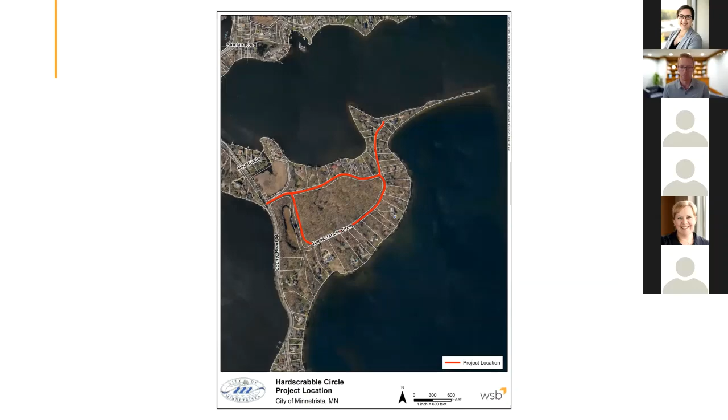So let's get into the project. We have 3 slides here with project location maps, as we are a little bit geographically dispersed with the project this year, coming up in 2021. The first area presented is Hardscrabble Circle and Hardscrabble Road, the neighborhood just east of County Road 44. That's one project area. Just south of there, still off of County Road 44, is Loring Drive, and further south is Stonebridge Road.

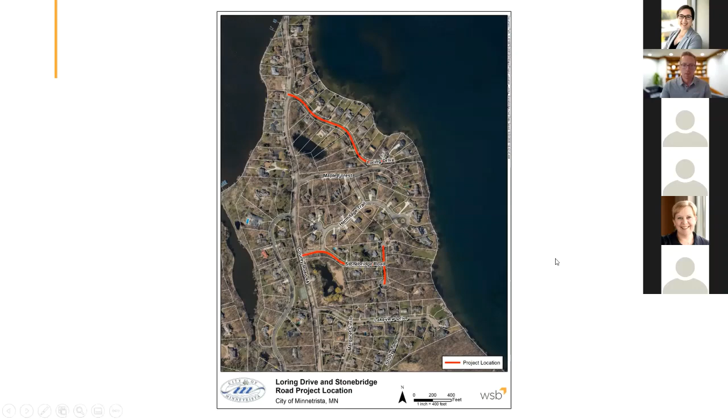Then we jump over and go north from here to a different part of town. Another street included in the 2021 project is Minneapolis Avenue, which is just west of County Road 19.

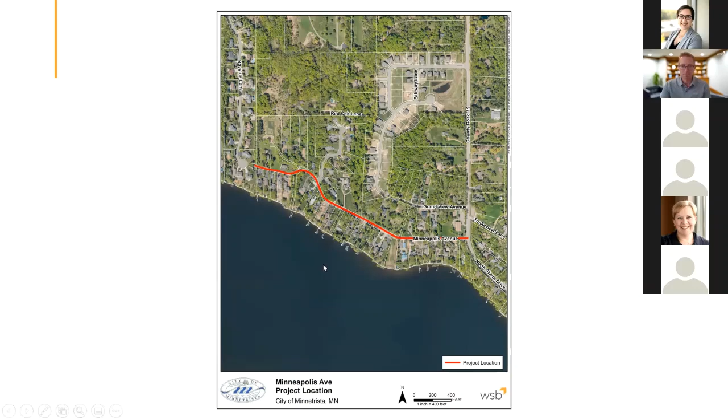So how did this project get started? Why is the city working to improve roads? The main driving factor is the capital improvement plan, and the direction city staff and city council want to move the city forward in order to improve it. This would mean improving the street and street conditions throughout the community to provide a safe, convenient, and cost-effective way for residents to get around town.

Prior to even determining what streets are included in a project, we look at the city as a whole and address all of the bituminous, or asphalt, streets. We look at their condition and score them based on a pavement condition index, which addresses a number of factors about the road and gives it a score. We look at that score and determine whether these roads need maintenance procedures, or whether they actually need to be reconstructed or included in an improvement project.

The other thing we do when putting a project together is look at what's underneath the roadway—does the city have water main, sanitary sewer, and storm sewer facilities, and what's the condition of those facilities? We'd like to disturb residents as little as possible, so when we're improving the pavement and streets in a neighborhood, we want to address any public utilities that have issues or need improvements, so we don't have to come back years later and affect residents again. So we also assess what the utilities look like in these neighborhoods.

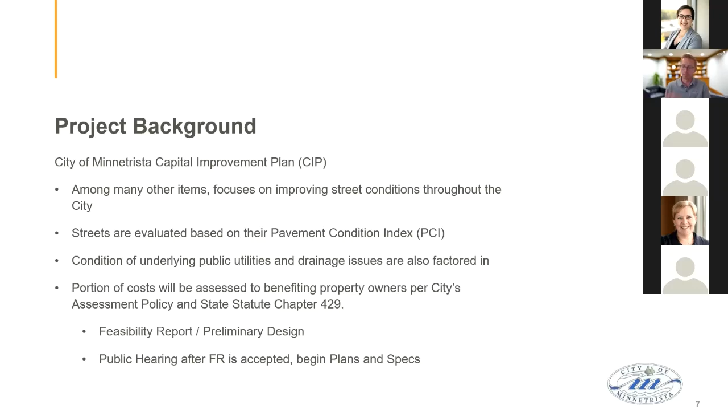After the feasibility report is accepted by the city council, there is a public hearing that orders the project. You as residents will be invited to that public hearing as well. If the council chooses, they would then authorize the preparation of plans and specifications for the project, and we'd really get into the design and creating the bid package to provide to a contractor. So that's the long-winded project background.

Let's talk about your specific streets. Let me minimize my video here so I can see. So as we look at the existing conditions, you folks are driving these roads day in and day out, and you know that the bituminous—another word for asphalt—material is starting to fail, or has been failing.

There is cracking in the form of alligator cracks, where it kind of looks like an alligator's back—it's really all falling apart. There's also transverse cracking, where there are large cracks across the roadway. Altogether, the pavement structure for all of the streets proposed in this project is structurally deficient, and it does need to be removed in order to be improved.

There's no maintenance work that can really provide a long-lasting solution. Public Works staff over the years has done a great job of patching these streets as best as they can, but that only works to a certain extent, and it can become expensive and costly, so that also gets factored into deciding when these streets are ready to be improved.

I mentioned the pavement condition index a couple slides ago, and on average, if you look at all the streets proposed in this project, it's 47. What that tells us is that's pretty poor, and it does need to be removed and replaced with new pavement.

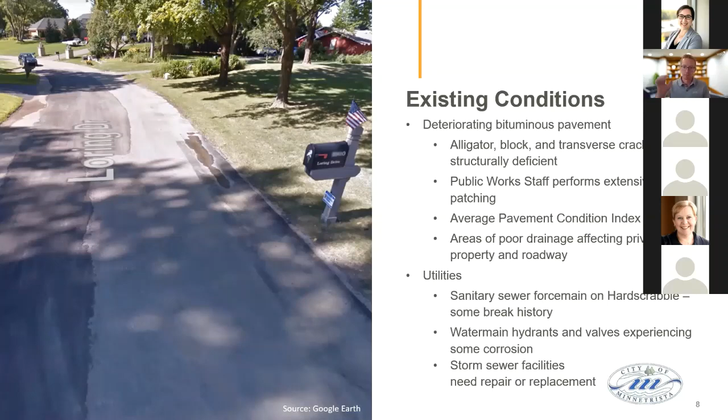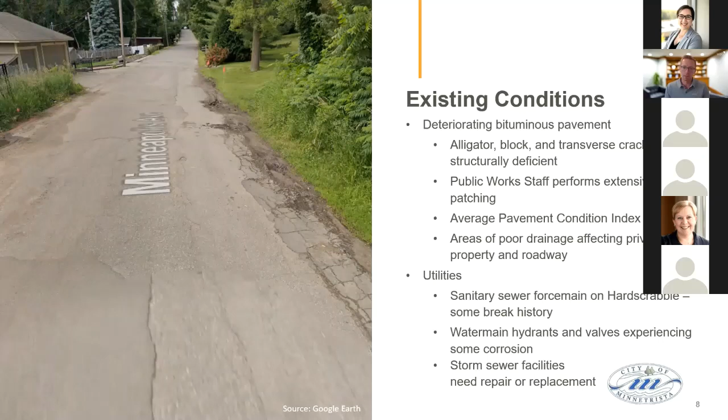So drainage is key, and a lot of these streets—I think we have Hardscrabble next—there's an example of the alligator cracking that I was referring to. We do want to address those areas of poor drainage as well.

As far as the utilities under these streets, it varies quite a bit based on what project area you live in. There's pretty much sanitary sewer throughout all these neighborhoods. There is a force main on Hardscrabble Road North, about 1,000 feet long, and with this project we do want to improve that pipe by replacing it. So there will be work on Hardscrabble Road North and a portion of Hardscrabble Circle where we want to improve the sanitary sewer force main.

There's some water main in the Stonebridge Road area, and historically what we've done is some work at the hydrant and valve locations, perhaps to eliminate or reduce some corrosion, or also to make the system function a little better. Maybe there needs to be a gate valve so that we don't affect as many residents when we do have to shut down water. So we look at that and propose those improvements to the water main.

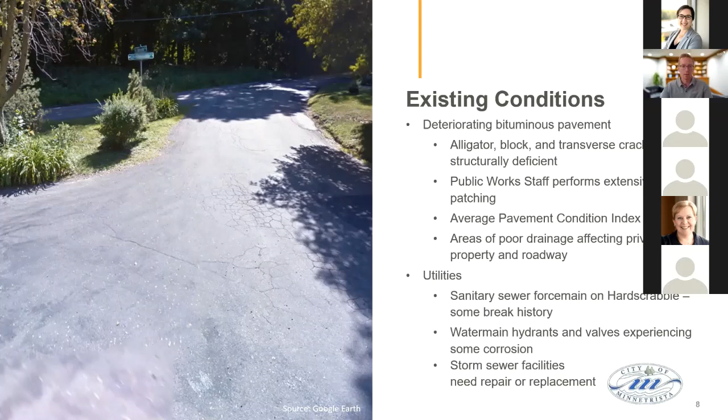And then a big one is the storm sewer facilities. All these streets don't have curb and gutter, but there is some storm sewer, and those storm sewers are kind of in disrepair. So we look at the condition of those and determine if they need to be repaired or replaced. We also will be looking at the site as a whole and look at drainage in different rain events, and determine if additional storm sewer is needed to help address the drainage on each of these project areas.

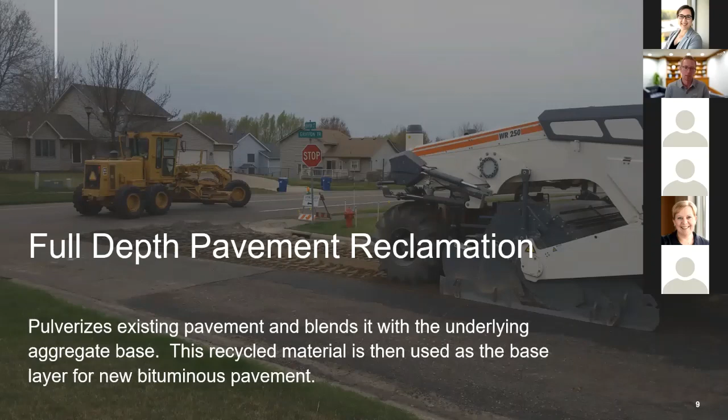The big component to this project is pavement reclamation. We've done this in the city of Minnetrista for a number of years, and it's somewhat of a sustainable way to reconstruct a road, in that it's actually going to reuse some of the existing materials on site for the new road. You can see on the picture here what a reclaimer looks like—it pulverizes the existing pavement that's in really poor shape and blends it with the gravel underneath. That creates a recycled material, which is then used as the new gravel that the new pavement goes over the top of. So it's kind of a cool feature. We do like to explain this process at these neighborhood meetings so you have an idea of how that pavement's being reconstructed.

But as we look at the neighborhoods included in the 2021 project, the goal is to really keep the geometry of the roads very similar. So we're not proposing to change street widths—that's kind of outside of the scope. So if you look at the width of the street, that's essentially what it's going to be.

Along with the width, you also look at the grade of the street, where it drops down and goes back up. We don't really plan on adjusting those, because if you change them too much, it affects how the street grades into your lawns and landscaping, and we don't want to impact that too much. We will make minor adjustments as needed just to improve drainage at low points, and we can make some minor tweaks without being too impactful to your yards.

One big topic is going to be whether or not there is a need for curbing or a desire for curbing on each street from the residents. So I'll briefly mention that now.

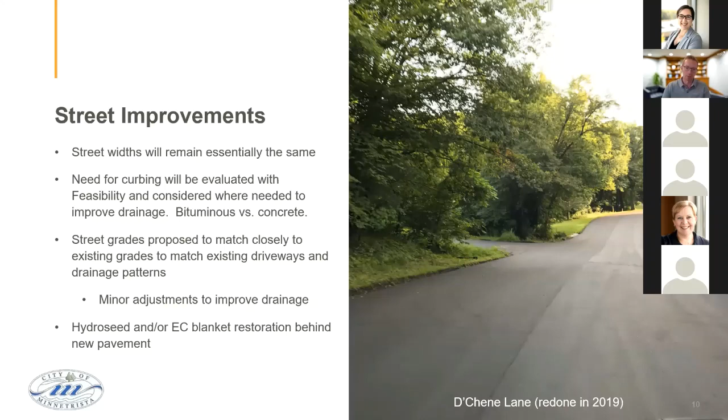Of course we're not replacing water main, but it's very similar work when you're talking about sanitary sewer. It gives you a visual that these pipes are anywhere from 5 to 6 to 7, 8 feet below the pavement surface. So there will be big equipment on Hardscrabble installing that new main.

If it's determined that open trench is needed, the other option that will be considered in feasibility is actually drilling that pipe, which has a lot less impact to the surface. So we'll evaluate that as we go forward with the design.

There are some manholes in the roadway. Those will get adjusted so that they are smooth, and when you drive over them, you don't necessarily feel a big pothole.

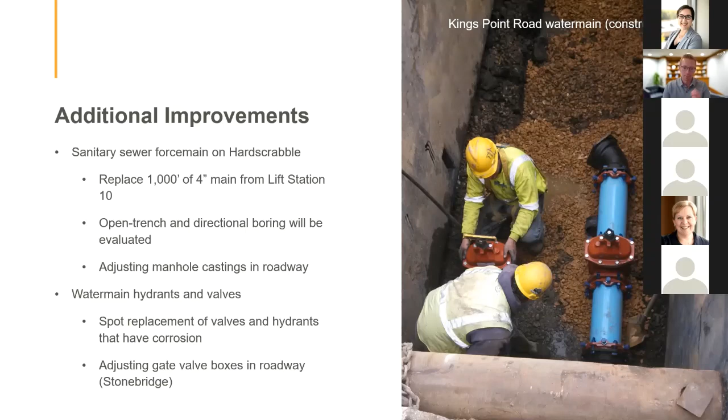And then the water main on Stonebridge, there'll be, like I mentioned, some work at the valves and hydrants, and of course adjusting any water main components that are in the roadway, again to meet that new layer of pavement nicely so that you don't necessarily feel it when you're driving over it.

We have some storm sewer on the project. Hardscrabble has a few culverts that we're going to assess the condition of and likely replace those crossings as needed.

In other areas, such as Loring, at the low point on Loring Drive, there'll likely be a need to add some storm sewer to make sure we can capture all the necessary drainage. Same with Minneapolis Avenue, and likely at Stonebridge as you approach County Road 44, there might be some work there, and then in the southerly cul-de-sac on Stonebridge. So we'll be looking at, from a design standpoint, where these structures are warranted, and also the condition of the existing structures to see if they need to be replaced.

One other item we'll be reviewing with the preliminary design and feasibility report is rain gardens or other drainage management features, because there wasn't really a whole lot of ponding in any of these neighborhoods, or there isn't an opportunity to connect to it.

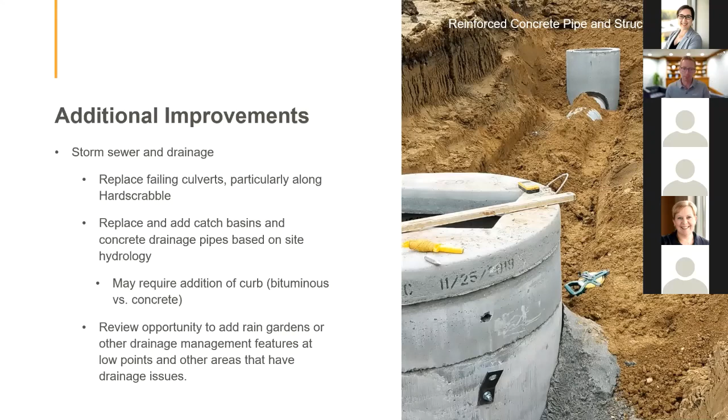So there might be an opportunity to install rain gardens, particularly on Hardscrabble Road North. There's a low point there, for those residents who are familiar, by the city's lift station, and there's no real place for the drainage to go. So that location would be somewhere we'd look at implementing a drainage management feature to help solve those issues for the residents.

So at this time, we do have a preliminary estimated project cost. It's a budget number, and for the total project right now it's estimated at $1.65 million. That's made up of surface improvements, which is the roadway, the curbing, any earthwork necessary, storm sewer improvements, and then sanitary and water improvements.

The reason we list that out here is, as we'll continue to talk about financing, the assessments. We break out the surface improvements and the storm sewer improvements, or drainage improvements, because those are assessable per the city's assessment policy at 50%.

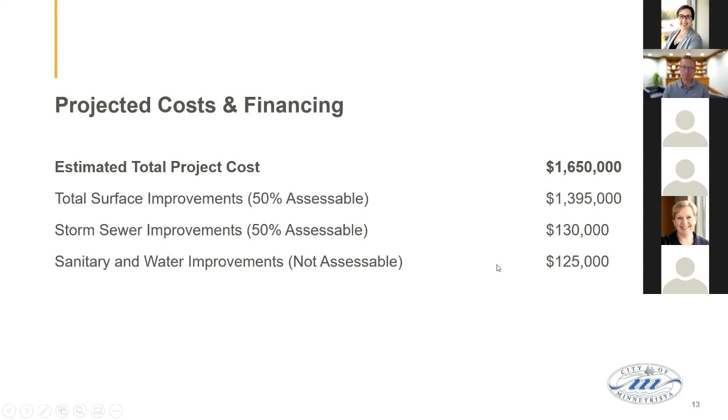So let's talk briefly about the assessment policy. For a project of this scope, as I mentioned, the costs associated with the surface and stormwater improvements are assessed at 50%. There's no assessment for the costs associated with any water main work or sanitary sewer work. Those costs are funded by the city's funds for that particular type of work.

All properties within the project area are assessed on a per parcel basis. So each parcel, or your property, is assigned one unit, and there'll be one assessment for your parcel. We'll talk a little bit more about that, but that will also be broken out by project area and street.

There is some language in the assessment policy, as well as the state statute, regarding if you have a hardship, you may have an opportunity for a deferral. We can get more into that if you believe you're in that category and have questions about it. You can start with me, or go directly to Brian Grimm, our city finance director, or really any one of us staff will get you to the right person to talk about a hardship deferral if you fall in that category.

Typically, in years past, we've done a payment period of 20 years for the assessment, and we'll talk more about this. This meeting tonight is more about getting information from the residents, and there will be an assessment hearing, with letters and more information provided on this. But if you have questions about that payment period and how it goes on your taxes, you can speak with myself or Brian Grimm again, City Finance Director.

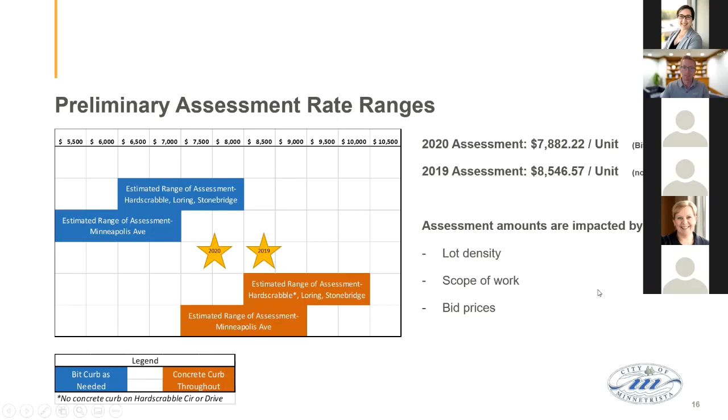So real briefly, how does this number get tightened up, and when is an actual number provided to residents? The City Council authorized the preparation of a feasibility report and preliminary design on September 21st. The consultant has a crew out performing topographic survey, which gathers data for the design. We work on the preliminary design and calculate a detailed preliminary construction cost based on all that data: resident feedback, topographic survey information, field visits, proposed work, and utility conditions. We combine that all into an opinion of probable cost for the project, then include that preliminary assessment rate in the feasibility report presented to the City Council on November 16th.

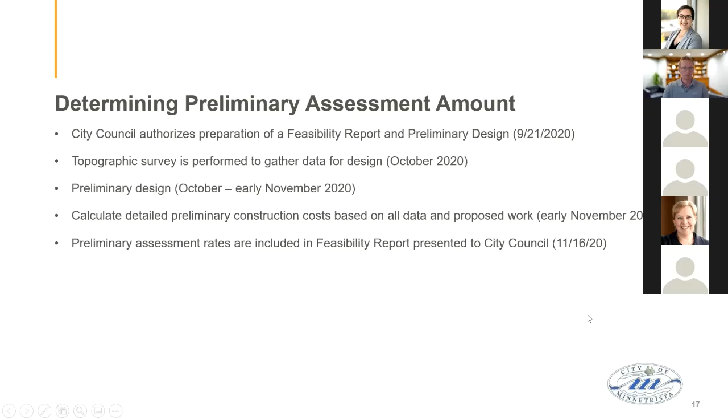So right now you are at the neighborhood meeting. Here's the project schedule as we go forward. I mentioned accepting the feasibility report. Actually, I think we have the wrong date there. This is the correct date, December 7th. That would be when the feasibility report is presented to the council.

Then we'd have the public hearing. Residents would receive an invite to that public hearing, and at that point the council would listen to resident feedback if there was any. Then they have the option to order the preparation of plans and specifications. We'd work on design over the winter and then present the bid package out to contractors to bid on, and we'd open those bids on March 9th.

And then we'd work towards ordering an assessment hearing where you would have another chance to speak to the council directly about the assessments. At that point, we would have the actual assessment calculation based on the bids. We'd go forward with accepting the project, awarding the contract, and construction would begin in June, working into October to complete the project.

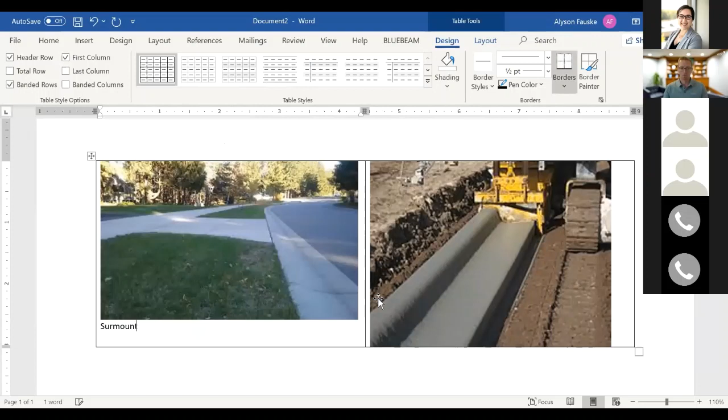Adam, this is Mayor Whalen. If I could make a comment regarding the question about electrical lines being buried — many years ago we did a project on Maple Crest, and the residents there unanimously wanted the power lines buried. The electrical company was not going to do that for free, and the city said if all the residents are interested, they would be assessed 100% for that cost. There were far fewer people to get on board with, and that cost was assessed to the property owners. Just an FYI regarding electrical lines.

Thank you, Madam Mayor. Beneficial information for the residents.

There is one other question that we've received on curbs: are mountable curbs an option in the concrete category? Perfect, thank you, Lydia.

It looks like our city engineer, Alyson, has shared her screen. I hope folks can see that. She's detailed the two types. The B style curb, a barrier high back curb, is on your right, which is more of an urban type curb, as Councilmember Mauder was saying. On the left, you've got the surmountable curb where you see a kind of ramp, and you'd be able to drive up nice and easily over that.

This does show a driveway as well, and with the reconstruction that occurs along the lakeside, a driveway can meet into any location on the back of curb. So to answer that specific question, either of these can be considered for the scenario. I think the city's preference would be to go with the surmountable.